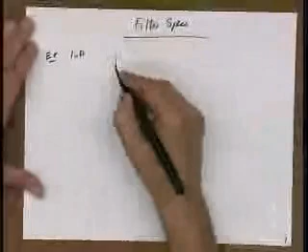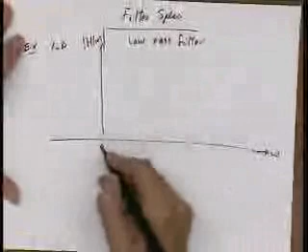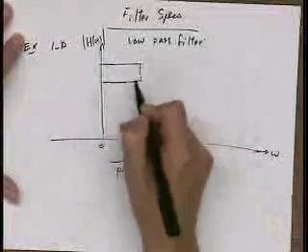Okay, so I'm going to start with a one-dimensional example. If I have a low-pass filter, then as a function of omega, I can talk about the magnitude of H of omega satisfying certain constraints. In particular, I can talk about a region in the frequency domain here, which we call the passband, where we require H of omega to be within a certain range, at most 1 but no less than 1 minus delta p. Because it's a low-pass filter, this is the region where you want the filter to pass the signal. And then you can also talk about a different region, which is called the stopband.

This is the band in which the filter is going to stop the signal, and you want the magnitude of H of omega to have a different set of characteristics. You want it to be very small. You want not to let the signals go. And this band in between omega p and omega s is just called the transition band.

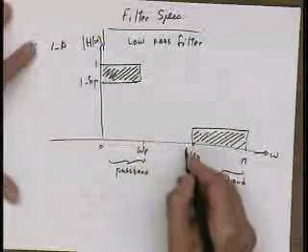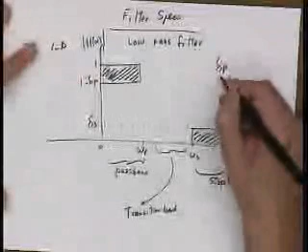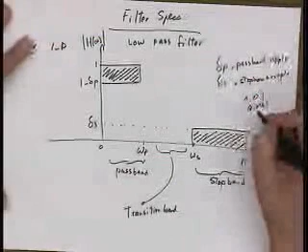And we don't put any conditions or requirements or specifications on the filter here. And for stop band, let's say we say that the magnitude of H of omega has to be smaller than delta s. So in general, delta p and delta s are called ripples. This is called passband ripple, and this is called stop band ripple. And they could take numbers like 0.01 or 0.001, and they need not be the same. They could be different. Okay.

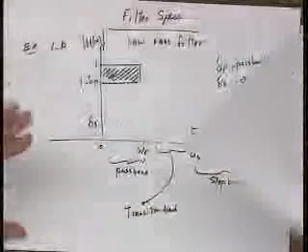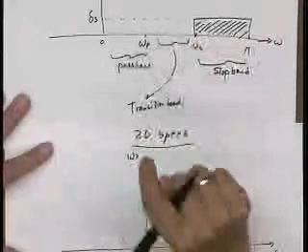So now we move on to 2 dimensions, and you can talk about 2-dimensional specifications just as easily, more or less the same way. So 2-dimensional specs. Now, instead of plotting as a function of omega, we plot something in the omega 1, omega 2 plane, and instead of having a passband edge and a stop band edge like omega p and omega s, we're going to have a passband contour and a stop band contour. We call this C sub p, and we call this C sub s. This is the passband contour. So this is again a low-pass filter, but in 2D.

And basically now our specification becomes something like this. We want the magnitude of H of omega 1, omega 2 to be between 1 and 1 minus delta p for all omega 1 and omega 2 that are inside C sub p, inside the passband. So this is our passband region.

And then for stop band, we'll have the following. We want the magnitude of H of omega 1, omega 2 to be smaller than delta s for all omega 1 and omega 2 that are outside C sub s. So this would be the stop band region. And let me just use a different color, like green. This would be the passband region. Okay. So similar sort of ideas hold.

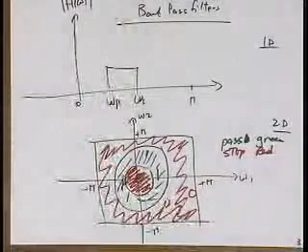And then there's also, I'm not going to talk about it, band stop, where you're letting all the frequencies go through except for one band. For example, what would be a typical example when you use band stop filters in 1D? If you want to get rid of 60 hertz interference: you have a signal, you want all of it, but there's this big spike at 60 hertz because of interference. So you pass it through a band stop filter that passes everything except for that region around 60 hertz.

In 2D, you can also have a different kind of filter whose equivalent doesn't exist in 1D, and that's a directional filter, because the notion of direction doesn't really exist in 1D, but it does exist in 2D. So you want to pass frequencies along a certain direction and reject frequencies along a different direction. I think one of your homework assignments is just on that, directional filters. I can't remember now. I think you might have a MATLAB assignment on this in a week or two.

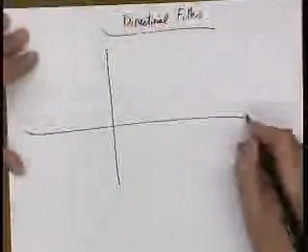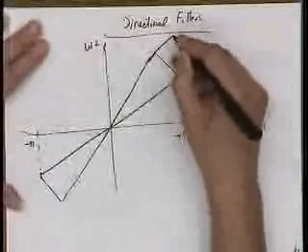So what it is, for example, you want to draw a line like this. Okay. And again, this goes from minus pi to plus pi. So you pass these, and then you stop the rest of it. Okay, and you could say the angle is theta, etc.

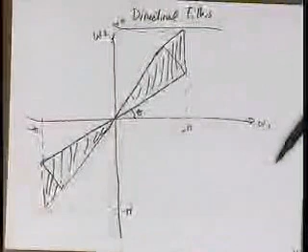So in images and in two-dimensional signals, if you have features that are predominantly horizontal or predominantly vertical or predominantly at an arbitrary angle, you can either eliminate those or accentuate those and try to catch the edges and the directions along a particular direction by using a directional filter.

Or if you're doing two-dimensional signal processing, you have filters in a plane and, let's say there's waves coming at you and you want to know which direction this wave was coming from. You can have a series of filters like that along different directions, and then look at the output and say, the output of the angle theta is largest, so there must be some signal coming from there.

And back in the mid 80s, we were deeply involved in the Cold War, and we were in the business of test verification. For example, at Lawrence Livermore, a bunch of my friends were working on designing adaptive directional filters. They would implement them underground in order to listen to the Soviet nuclear explosions underground, and figure out what direction the signals are coming from, whether or not they're doing any nuclear testing, whether the signals are arriving from this part of Russia or the other part of Russia, or whether it's maybe China doing the tests, etc. So this is used for detecting the direction at which signals are arriving.

And it's also used actually in image processing. It turns out that there's a notion of directional subband coding, and subband coding is a technique for image compression. David Taubman, in I think 1993 or 4, he and I published a paper on subband directional filters as well. So there's all kinds of 2D filters one could think about designing, and what are some of the techniques that we're going to use to do that?

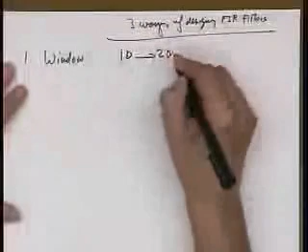There's 3 basic ways of designing FIR filters, and we're primarily concerned about finite impulse response filters because they can be done with 0 phase or linear phase with a simple symmetry constraint, and also they have no stability issues. The first technique I'm briefly going to talk about is the window, and the extension from 1D to 2D is very straightforward. The second technique is frequency sampling, and again the extension is very easy. And then the third technique is design by transformation.

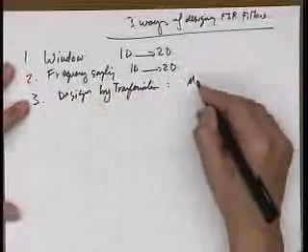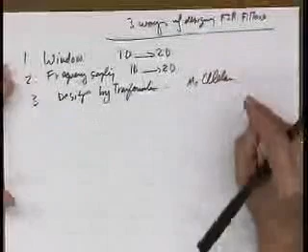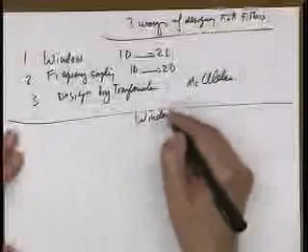This is a technique that McClellan, who is now at Georgia Tech, came up with many years ago. And this is something, the equivalent of which in 1D doesn't exist, but essentially the idea is let's transform the problem into a one-dimensional problem, design a good filter in 1D, and then we'll get an answer in 2D. So let me begin real quickly with the window technique. And again, this is pretty much a review of 123.

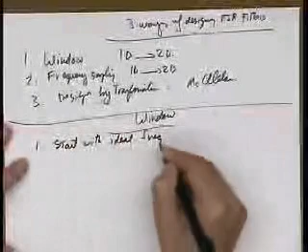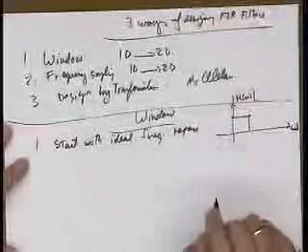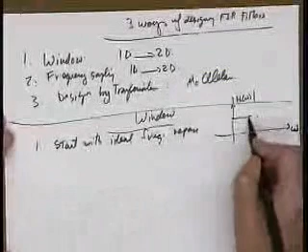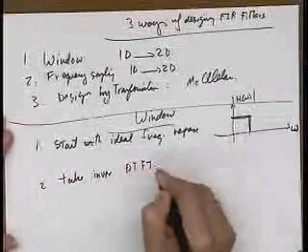You start with an ideal frequency response. Something that you want. Suppose somebody has come to you and says, I want a brick filter. Well, we all know that's an ideal frequency response, and if you really wanted to get that, you would have to have an impulse response that's sinc, which is not only IIR, it's an IIR filter with non-rational transfer function. So forget about that, but still you can dream of having an ideal thing. And then take the inverse discrete time Fourier transform of that. In the case of this thing, it could be, for example, an h of n, which is a sinc function. Okay, and it could be infinitely long.

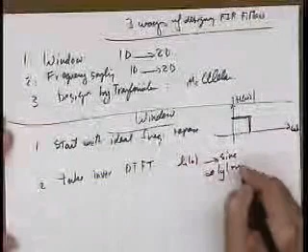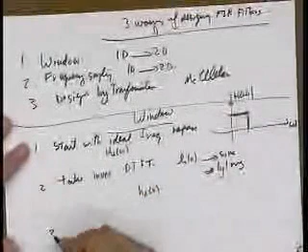And let's just call this thing h sub d of omega. We call this thing h sub d of n, the desired infinitely long impulse response. And now, because this is infinitely long and it's an IIR, then to make it FIR, we just multiply h of n by some window function w of n. And this guy is just a window function, right? So all of this just in a very straightforward way translates into 2 dimensions in the following sense.

If you can roll up, please. Thank you.

So we just do all those same steps, and we'll have h of n1 and n2 being equal to a window function w of n1 and n2 times h sub d of n1 and n2. This window function could be very simple. It could be just a rectangular window that basically just truncates this IIR filter. It could have some other fancy shapes. It could be a raised cosine window, a Hamming, Hanning, Blackman. There's as many windows as your heart desires.

Just so that I can have a quick understanding of how much you've been exposed to this before, how many people have heard of the window design technique in FIR filter design before? Oh, fantastic. So we won't go over it too much. So really quickly, if this is your h of omega, the desired magnitude ranging from minus omega p to plus omega p, and this is your h sub d of n, which is a sinc type thing.

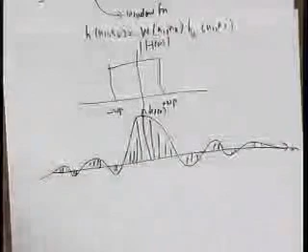Then you multiply it by the window function, which would truncate it. This is your window function. And essentially by doing this multiplication in the time domain, you're convolving the Fourier transform of the window function with H sub d of omega. So the resulting H of omega that you get, the magnitude of it, is going to be, so here we're going to be convolving W of omega with H sub d of omega.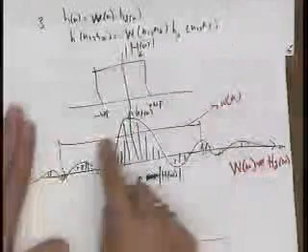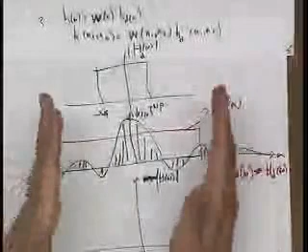And generally speaking, the longer the duration of this window is, the more the Fourier transform of the window is going to be like a delta function, and therefore a delta function convolved with H sub d of omega is going to keep H sub d of omega as intact as possible, right? What is the Fourier transform of w of n, the window function? If it is a rectangular one, it's a sinc. So the shorter this w of n is, the fatter the sinc is, and when you convolve that sinc with this thing, you're going to get a slower transition, some ripples here, and a slower transition back.

Okay, and you can also have similar arguments with other window functions. So the duration and the shape of this guy determines how good the final H of omega looks. So the shape and the length of the window, let's just write that down. The length of w of n and the shape of it determine how good H of omega ends up looking.

So how do we translate all of these things in 2D? Well, first of all, in 2D, we're very much interested in linear phase or zero phase kind of filters. So let me roll back, please, just a tiny bit. So 2D windows: generally speaking, if I have an H of omega, it has a magnitude and it has a phase. And linear phase means that phi of omega is linear in omega. That's all that means. And zero phase means phi of omega is just 0. So in this case, if I plot phi of omega as a function of omega, I get a line. And in this case, I just get 0. Okay?

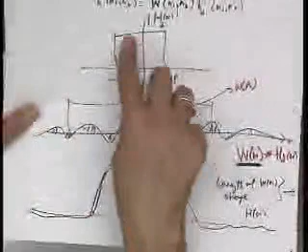I guess one thing that you want to walk away with in this picture, just a reminder of 123, is the main lobe width of the Fourier transform of the window function tells you how long the transition takes, because you're convolving this with H sub d of omega. So the fatter the main lobe width of W of omega, the Fourier transform of the window, the longer the transition is, because you're convolving it with this guy, right? And then the second attribute of this window is the side lobe height. If this guy has a lot of side lobe height, as you're convolving, when you're here at these positions, there's going to be a lot of ripple here, and here, and here.

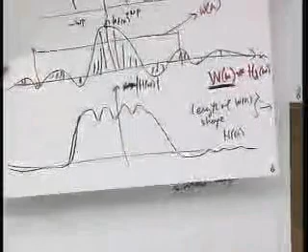And when we teach 123 in 1D, there's a whole lot of discussion. If you use a rectangular window, you get very good main lobe width, but terrible side lobes. If you use raised cosine, Hanning, etc., the main lobe gets bigger, but the side lobe gets smaller. And so people are all confused. What window shall I use? Kaiser offers a very nice compromise or trade-off. It has a knob alpha, just like a knob on your stereo. You can tweak alpha, and by doing that, you can do this trade-off between main lobe width and side lobe height of the Fourier transform of your window, which translates into the trade-off between transition width of your final filter and the amount of ripple that you get in passband and stopband.

Okay. And I still haven't defined I0, just for the sake of completeness. I0 of x is just a modified zeroth order Bessel function. And there's various ways of defining it. One of them is to say Bessel function. One of them is to say it's a solution of a differential equation. Another way is to write it in terms of series. I0 of x is the summation from i equals 0 to infinity of x to the power of 2i.

2 to the power of 2i, and then i factorial squared. Okay. And you can look up the definitions of zeroth order Bessel functions, these series expansions, in any CRC handbook, mathematical CRC handbooks.

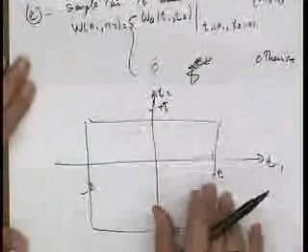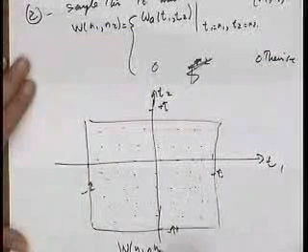Great. So you've decided that as a function of T1 and T2, this goes from minus tau to plus tau in this direction, minus tau, plus tau in this direction, and you first come up with WA of T1 and T2, and then you sample it. And it's supposed to be equally spaced, even though I'm not doing it equally spaced. So in essence, the discrete time window that you get, W of N1 and N2, is WA of N1 times WA of N2, where this is just a sampled version of WA of T.

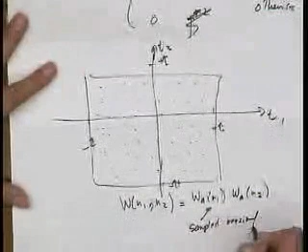Okay. And this is called separable, right? Now we have a window function that's separable, and the Fourier transform of this guy is just the Fourier transform of this times the Fourier transform of the other, WA of omega 1 times WA of omega 2. So that's one simple way. You have a one-dimensional window, just multiply it in dimension T1 and dimension T2 to get from the one-dimensional window to the two-dimensional window. And the second way of doing this is just rotate the one-dimensional window to get the two-dimensional window out of it.

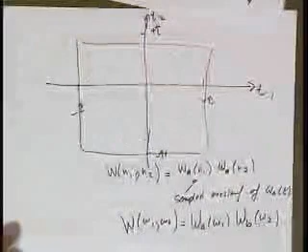So, are there any questions? Let me pause for a second. Yeah. Is it because they're separable that you multiply the... Right. I think we showed that almost lecture 1 or something like that, or we just mentioned it. You can prove it very easily as a Fourier transform property. And what we showed at the beginning of the class also is that if your impulse response was separable, you can do the computation a lot faster than if it wasn't separable.

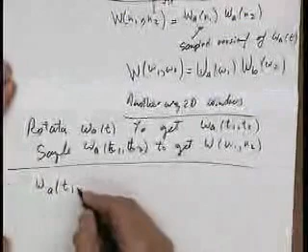So another way to do 2D windows is just the rotation business. In other words, rotate WA of T to get WA of T1 and T2, and then sample WA of T1 and T2 to get W of N1 and N2. Okay. So what do I mean by that? Well, WA of T1 and T2 is just WA of T, but rotated. So replace T with square root of T1 squared plus T2 squared.

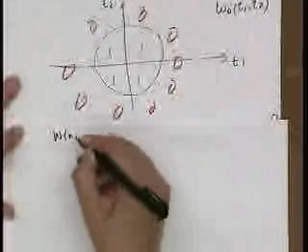Okay. So now the picture that you get for WA of T1 and T2 is something that takes on the value 1 here and takes on the value 0 outside. Okay. And thank you. So now that I did the rotation, now I have to sample this. So W of N1 comma N2 is WA of T1 and T2, sampled at T1 equals N1 and T2 equals N2 for all the N1s and N2s that are in some region R sub W, and it's 0 otherwise.

Okay, so this is a circularly symmetric window, and I'll show you now some pictures of these things in action. At the end of the day, when you use a circularly symmetric window, it turns out the H of omega 1 and omega 2, the frequency response that you get, also has contours that are circularly symmetric. So let's take a quick look at that. That'll be chapter 4.

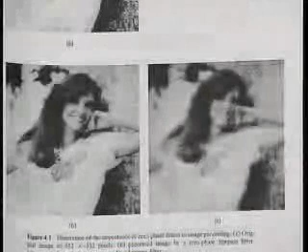If you have the book, look at 4.1 in Jae Lim's book. So this kind of shows you the example of processing images with linear phase versus nonlinear phase. Okay. What are some of the features between A and B? Because that's the difference between 0 and linear phase, right? No. A was the original. Oh, A is the original. That's okay. B is just applying.

In this case, he does 0 phase. There's no difference between 0 phase and linear phase, by the way. So if I do 0 phase, I've gone an extra mile in making the phase actually 0. But 0 phase and linear phase are just as good, because it's the derivative of the phase. Remember, d phi omega d omega, that's delay, right? The derivative of phase of the Fourier transform, that's the delay of that filter.

And you want the delay to be constant no matter what the frequencies are, because it delays all the sinusoids of different frequencies the same amount. So if their shift was this much before, their distance is the same after the filtering process. So that's really what preserves the edges. Is that point clear? Okay, so that's all I want to talk about in terms of the window technique.

Next, I wanted to quickly talk about frequency sampling. Again, it's a straightforward extension of one dimension. I lost my pen again. No, this is good. Okay, so frequency sampling technique. And just like it sounds, you go to the frequency domain, omega 1, omega 2, and you're going from minus pi to plus pi, minus pi to plus pi.

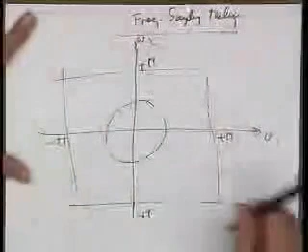And let's say you want to design a low-pass filter that passes these bands and stops all these other bands. So it's 1 everywhere here and 0 everywhere here. So I'm going to say stop band is here and pass band is here. Okay. And how do we do that? Well, the way this thing works is you just sample the frequency domain at equally spaced points.

Pretend those are equal. It's a grid, and you take inverse DFT of it, and you get a filter. So you sample this 0, 0, 0, and then 0, 0, 1, 1, 1, 0, 0, 0, 0, 1, 1, 1, 0, 0, 0, 0, 0, 0, 0, 0, etc. And then you have an array of zeros and ones. You take the inverse DFT of it, and you get an array.

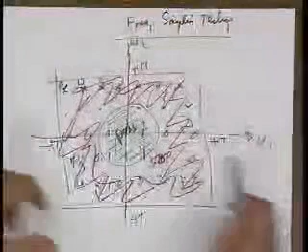Let's say you sample it at the 10 by 10 point, or let's just be realistic, 16 by 16 samples. You take the inverse DFT of it, you get a 16 by 16 array, and that's it. That's your filter. Is that a good technique or a bad one, and why? What's the frequency response of that filter? That resulting FIR filter we just got, what would be the frequency response of it?

Well, at these points that I sample it, it'll be exactly what those samples were. And in between, all hell breaks loose. Who knows what it does? It could go up, down, ripple, everything. So let me just write down the basic steps.

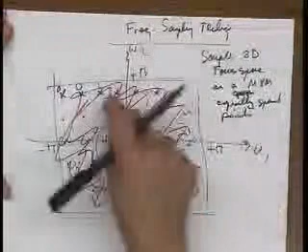You sample the 2D Fourier space on a grid, let's say an m by m grid, m by m equally spaced points. And from Fourier theory, you know that the signal that you get will have a DTFT that at those samples will be what you force them to be, but in between the samples, it's probably going to be 0 at this point, 0 at that point, but the DTFT in between these points here could be anything. Okay?

And then take inverse DFT to get the m by m FIR filter. It's the equivalent of the 1D version where you start with an H of omega as a function of omega and you sample it between 0 and pi and take the inverse DFT in one dimension. And let me just show you some examples of filters using that.

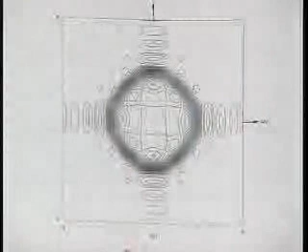You can see it has a hell of a lot of ripples, and this is the contour plot for it as well. Not really very good. It's not even as good as the window design. Yeah. I'm just a little confused. So you create this grid of frequency samples, and then you set some of them equal to 1 in the middle and some equal to 0 on the edges. Isn't that going to be your frequency response? That's like your transfer function, right?

No, because I sampled the frequency response. The samples of my frequency response at those samples will be exactly 1, will be exactly 0. But in between the samples, remember when I talk about frequency response, H of omega 1, omega 2, omega 1 and omega 2 are continuous variables. I've only made samples of omega 1, omega 2 at just those locations behave the way I wanted it to behave. In between those that I didn't sample, it goes to hell. It could do anything.

And that's exactly what's here. Here, at those samples, it's exactly 1, and here, at those samples, it's 0. It's between them that things didn't behave, which causes the ripple. Again, omega 1 and omega 2 are real. Just because I sample the function at those points, it doesn't mean that in between those it's going to behave properly. Now, if instead of doing 15 by 15 I sampled it more finely, let's say 30 by 30, this would look a lot better. But what did I just do? I made the size of my filter 4 times bigger.

If I made it 60 by 60, that would be even better. But now I have a, wow, 3,600 point FIR filter. That's terrible. That's really big.

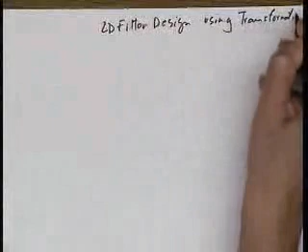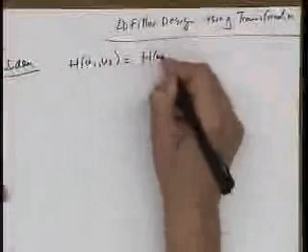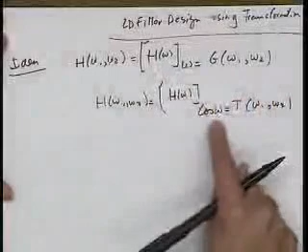So the basic idea is this. You start with H of omega 1 and omega 2, and you say that's equal to H of omega, with omega replaced by G of omega 1 and omega 2. Okay? Or another way of saying it is H of omega 1 and omega 2 is H of omega, where cosine omega is replaced by T of omega 1 and omega 2. And you'll see in a second why I call it cosine omega equals that versus omega equals this. They're all the same thing. It just pops out easier.

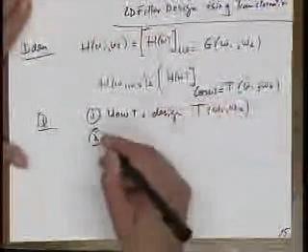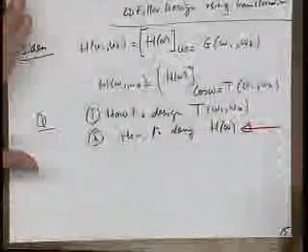So given that methodology, the questions that come up are, number one, how to design T of omega 1 and omega 2, and number two, how to design H of omega. Well, how to design H of omega, boy, there's a lot of rich theory that allows us to do that. There's optimal filter design. So really the basic challenge then becomes how to design this guy T. Okay. So the first thing I want to talk about for 1 minute is zero phase or linear phase, because I want to end up with zero or linear phase filters, right?

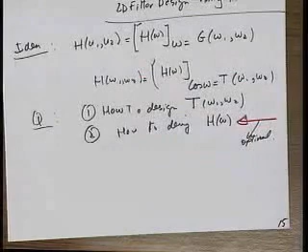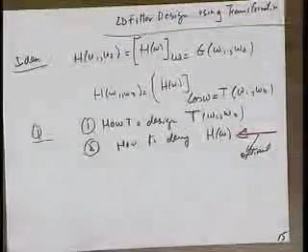So first of all, in one dimension, the claim I want to make is this. I want to say if my h of n, the impulse response in this, is zero phase, and if I impose certain conditions on this guy t, the final filter will also be zero phase. So make h zero phase, make t zero phase, and H of omega 1 and omega 2 will automatically be

zero phase. So before I get into that, I'd like to make one other comment about one-dimensional zero phase filters. Is it easy to design FIR filters in 1D that are zero phase or linear phase? Extremely. Why? What do we do in 1D to make sure our filters are linear phase or zero phase? Exactly. A symmetry condition is all that you need. And I like to mention that because I've emphasized zero phase is so important in image processing, and yet if I don't tell you how to make things zero phase or linear phase, then you might be very uncomfortable and not be able to sleep tonight. So let's remove that ambiguity here right away.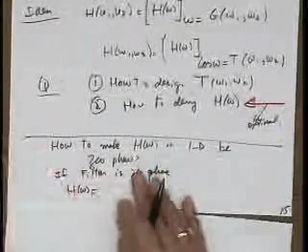So the question that I want to ask is the following: how to make H of omega in 1D be zero phase? Is that an easy job or a hard job? And the answer is, you can show that if the filter is zero phase, in other words, if I have an H of omega that's written as magnitude of H of omega times e to the j phi of omega, that means phi of omega is equal to 0 for all omega. Well, what does that mean? That means that H of omega is equal to H complex conjugate of omega, which means h of n is equal to h complex conjugate of minus n.

And furthermore, if I assume that h of n has real coefficients, not complex, since I'm dealing with real images and I don't want complex coefficient filters, that means h of n is equal to h of minus n. So what that boils down to is that zero phase in 1D implies, and is implied by, h of n being h of minus n. So if I just impose this symmetry condition on my one-dimensional filter taps, boom, my H of omega will be zero phase. Okay?

So in this transformation technique that I'm going to talk about, in order for me to have a shot at designing H of omega 1 and omega 2, my 2D filter, to be zero phase, to begin with, I'm going to start with an H of omega that's zero phase. Okay? So coming back now to our filter design, assume H of omega is zero phase. In other words, h of n is equal to h of minus n. And we assume h of n has 2N plus 1 samples, non-zero values. Okay? So what can I say? Well, in general, H of omega can be written as summation n from minus N to plus N of h of n e to the minus j omega n.

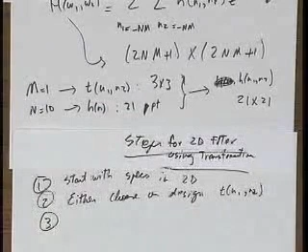Specs in 2D, specifications in 2D, and then you either choose or design this little filter T of n1 and n2, which is going to be no more than 3 by 3, at most 5 by 5. And then using this guy T, transform the specs in 2D into the specs for the 1D filter H of omega. In other words, derive specs for H of omega from the specs in 2D for H of omega 1 and omega 2, and given the T. You've already nailed down what T of n1 and n2 is. Either you chose it or you designed it, and I'll talk a little bit more about how you design it. So given that you know the T and the specs for H of omega 1 and omega 2, you can come up with a set of specs for H of omega.

And now we're doing the classic thing. Transfer a problem we didn't know how to do to a problem we do know how to do. We have like a gazillion years of experience in designing optimal H of omegas. So in other words, we want to design omega S, omega P, delta S, delta P for H of omega. We want to come up with a set of specs for that. Once you have that, you can now design H of omega, or alternatively h of n, let's say using optimal filter design, or in fact in MATLAB there's a Remez exchange algorithm you can use, etc.

And then when you're done with designing h of n, you can combine h of n and T of n1 and n2 to get h of n1 and n2. And how do we do that? Well, it's the thing we started off with. H of omega 1, omega 2 is H of omega, where we replace cosine omega with T of omega 1 and omega 2.